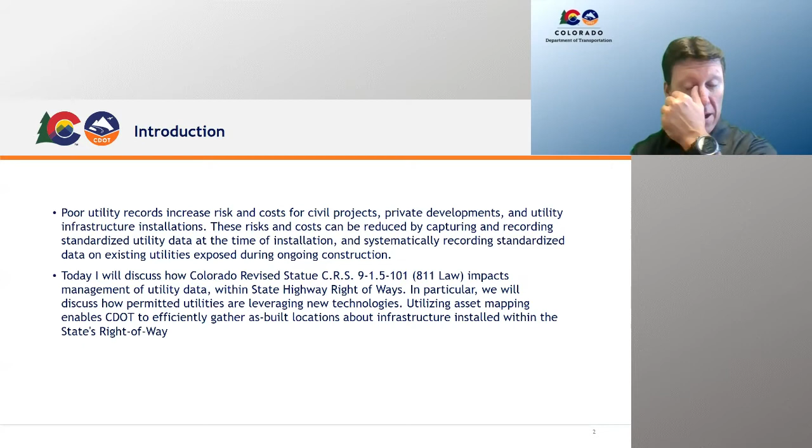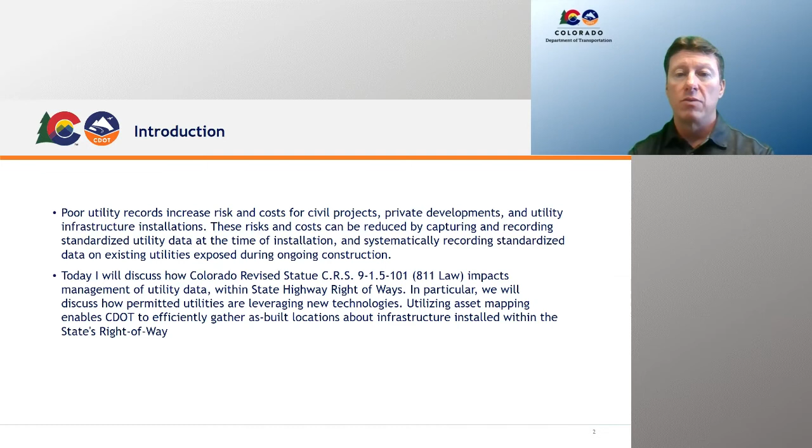You'll see here that I'll talk high level about what our 811 law impacts, but it does impact the utility data and how we manage basically the subsurface utilities and the records as we move forward with our state highway rights of way. And so I'll get into obviously what we're doing and how we're tied to this entire deliverable for utilities.

But nevertheless, the goal here is to identify what our limits are and the expectations for our utility companies, permittees pulling permits, where they cross in and out of our right of way, what's expected. We'll go through some of the examples of what CDOT has put together for those requirements and mandates that we have now for utility companies.

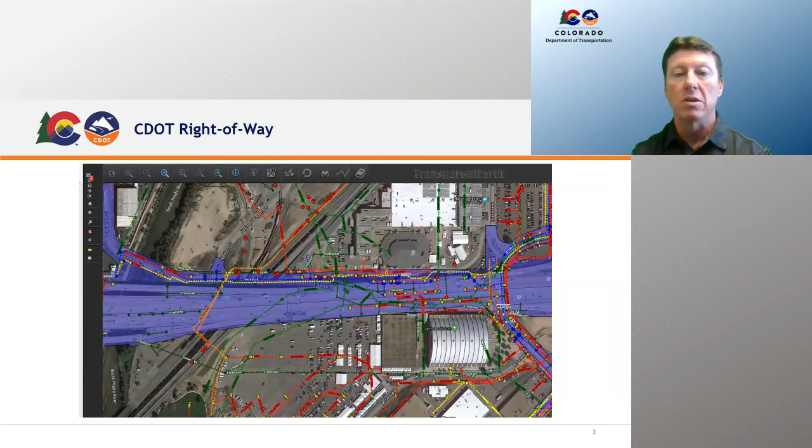A lot of discussion in the last session about a one-stop shop, and I spent several years trying to find a one-stop shop for a database and a mobile application that could process all the different types of data. And if you look at this graphic, when we look at all the survey data that's out there, the SUE data that's coming in, old GIS records or even current GIS records, CAD files and utility relocations, new installations, one call locates, and future projects, this is what we've seen from CDOT's perspective, that we need a place for all of this data to funnel into and then publish to the end users out in the field or in the office.

And so we looked at the Transparent Earth PointMan package for CDOT as a good solution because of how we operate with a lot of the legacy systems we have, and trying to find a solution or build one. We looked at trying to build one internally, and it was really cost prohibitive, and the time it would take to develop an internal process, or internal hardware and process, was going to be a much heavier lift than what we could take on. So that's why we looked at off-the-shelf solutions for Colorado.

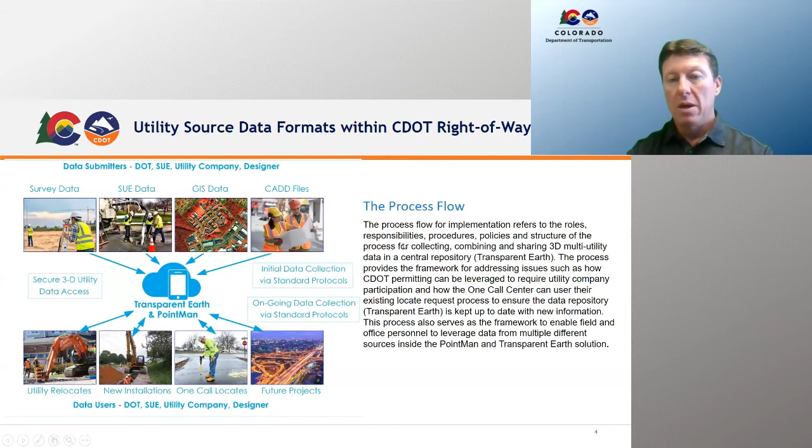And so you'll see our process flow over here on the right, that we're working to implement the roles and responsibilities, procedures, policies, and structure of the process for collecting, combining and sharing 3D utility data. And the framework really comes with having the proper tools for that, and then proper rules and regulations to implement that even further. And so when you look at Transparent Earth and PointMan for Colorado, we look at it really as a live subsurface utility engineering file.

The existing and new utilities, the CAD data, we have drone imagery, we have one call and excavation notifications, which a lot of states can tell you is really a place where we find a lot of discrepancy between one call locates for excavation and the amount of data we have supplied to the contractors in our utility plans for construction.

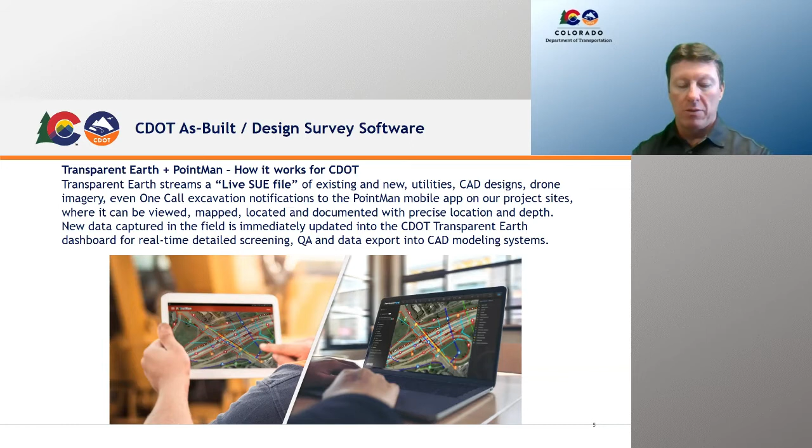There's differences there. Our goal with this process is to have a one-to-one relationship where our construction plans and the excavation locates match perfectly. I know that's unicorns and rainbows, but we really want to see that in the end, where our records are that good that when we work on a pre-construction package, the excavator goes out and they're looking at it with the mobile app, or they're putting it in the cab of their excavator, that they can rely on the fact that the paint on the ground is the same as what's being delivered to them electronically. It's a heavy lift, but that's the goal, that the records become very, very accurate horizontally and vertically. And so this is how Colorado's taking this on.

So it takes the mobile app, it takes high accuracy GNSS receivers like the Trimble R10, the integration to make it simple enough to use for the non-surveyor, and that's part of the goal. As a surveyor myself, I know how complicated it can be to survey with all this technology when things are not working, how to troubleshoot all this stuff.

And so that's still in here, but the startup and the integration and the corrections that we were talking about with R10 Trimble receivers and catalyst correction systems, all that stuff, we want to make that as seamless as possible so that utility companies, their contractors, third-party inspectors, all of these folks working in our right-of-way have access to this technology, and it's user-friendly enough that they should be collecting data at a higher accuracy just based on the simple integration. That's what this is intended to reflect, that you can tie this GPS receiver, RTK receiver to the mobile side much easier.

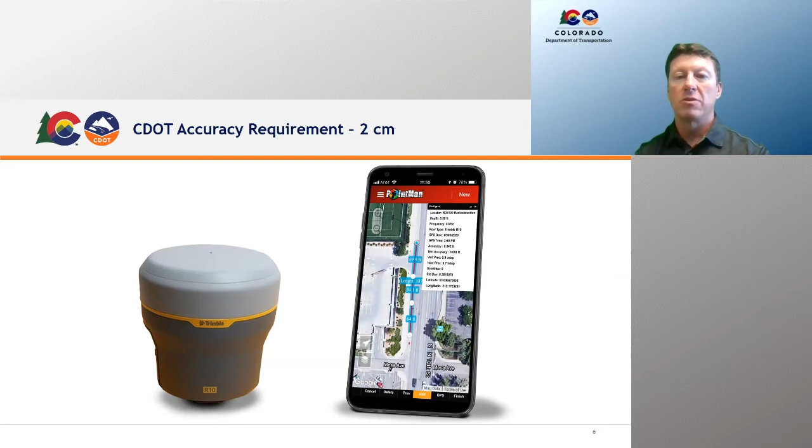And part of what I really like about the system is the survey record capture. Paige spoke about that quite a bit, and this is just one example of some data that we collected on an as-built of a railroad project. New construction concrete panels went in on this crossing.

We were able to collect the final elevation and grade because there was a little bit of change in the tracks. It actually came up a little bit, and so our approach slabs into the concrete panels were rough. And so we were able to go out and actually collect down to centimeter level and see how much the pads had changed versus our approach, and then we were able to tell our maintenance folks how far the approach paving needed to go back in order to smooth out that crossing. And so that's just an as-built on the railroad side of things.

Same thing with utilities, but the slide on the right is also one of the nuances that we like for our mobile app, which was survey information that comes in through the settings side of things. So if you look at the GPS portion of this down at the bottom, you'll see that there's some projections that are built into the library. So NAD 83 2011 is built into there. The geoid models are built into there for those that are wondering about the geoid models in the US. Those give us ground corrected elevations.

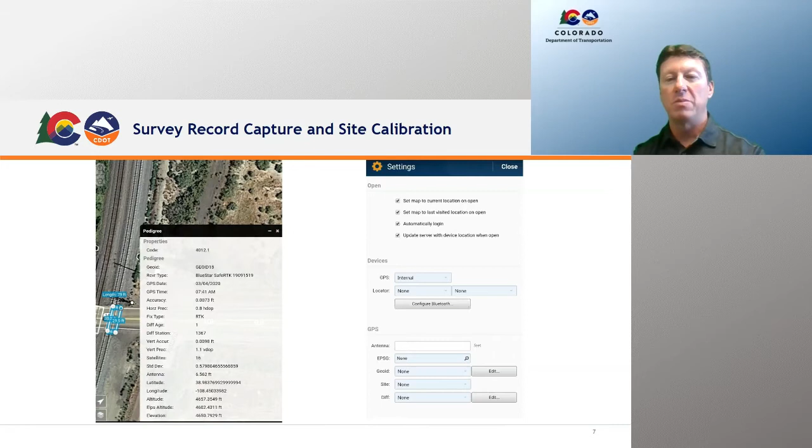So a lot of survey GPS stuff, but this is some of the stuff that we really look to for the GPS or GIS survey kind of hybrid system that I continue to talk about. We're not fully on the GIS side, we're not fully survey, but we're somewhere in this hybrid of survey GIS. So it's more like a high accuracy GIS world. And so there was a lot of discussion about database, and this is the GIS side of it that's important to us, because we're able to grab the metadata from the data that is collected in the field. So if you look at this record, it just shows simply that the owner of this water line is the city of Denver. It's an 8-inch PVC. All your GIS applications will do the same thing.

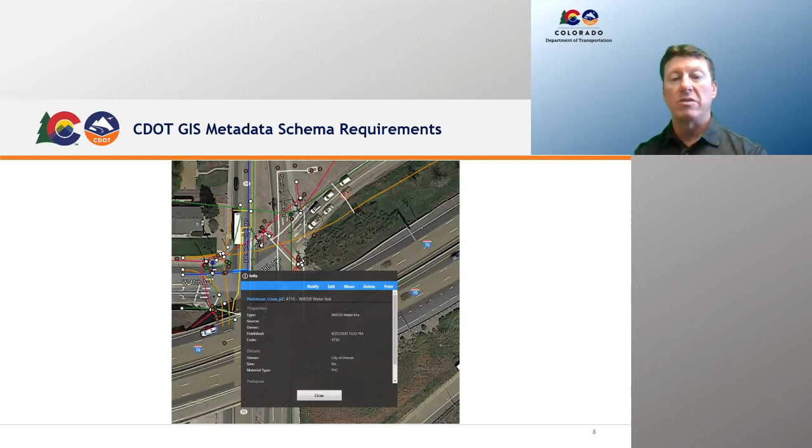One of the things that we really like at CDOT, if you can see it well enough, there's a code in there, 4710. That's a survey code that's built into a custom data dictionary that allows that code to migrate into MicroStation for us, and it will actually add the waterline symbology that's built into our MicroStation world. But more than that, we can also bring in shape files into our MicroStation environment for 3D modeling and clash detection, and that's where having northing, easting, and elevation tied to that is important to CDOT. So with that, that's some of the background on CDOT and our expectations, the hardware and software that we've selected: ProStar, their solution with PointMan and Transparent Earth.

So how do we leverage all this within our right of way? We know that we have the tools. We now have to find a way to mandate or train or whatever we're going to do to get this out there so that it's leveraged. And that all starts with the utility permits on our side. Every utility installation within our highway right-of-way starts with the utility permit.

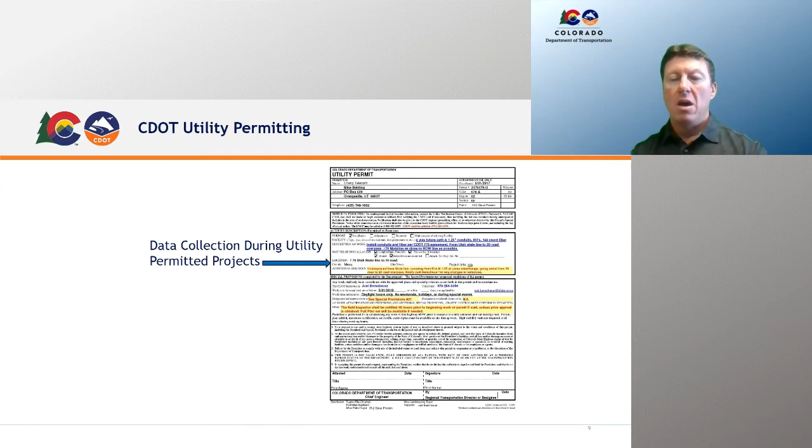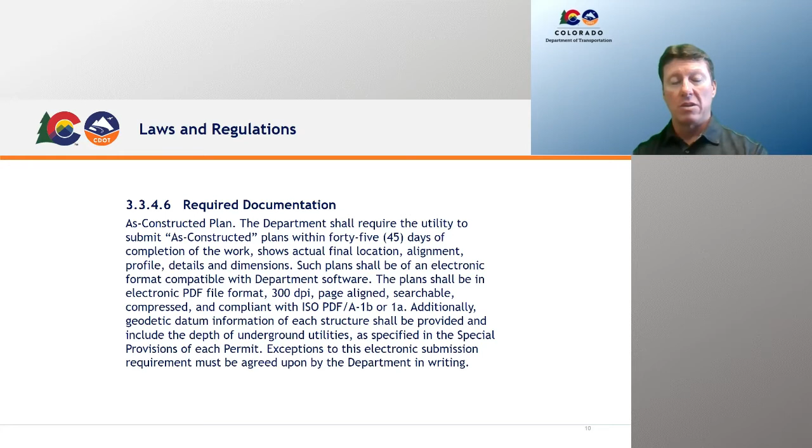And so that permit for us means that we need to make sure that we have required documentation built into our code, so that whenever that permit is executed, the contract between CDOT and the utility owner is clear that they are to provide us as-constructed plans, electronic as-builts, and what that expectation is. And so we have that in our system, in our utility accommodation code, and it's built into our permit terms and conditions and other notifications through the permit. And I'll show you some examples of those here in just a second.

One of the other things that's important for CDOT to follow, that we feel anyway, is this new standard coming out of ASCE. The American Society of Civil Engineers, the Construction Institute, and the Utility Engineering and Surveying Institute have developed a standard guideline for recording and exchanging utility infrastructure data in an as-installed condition. This document is very important for us because it standardizes the expectation of what the as-built needs to be and what it needs to look like.

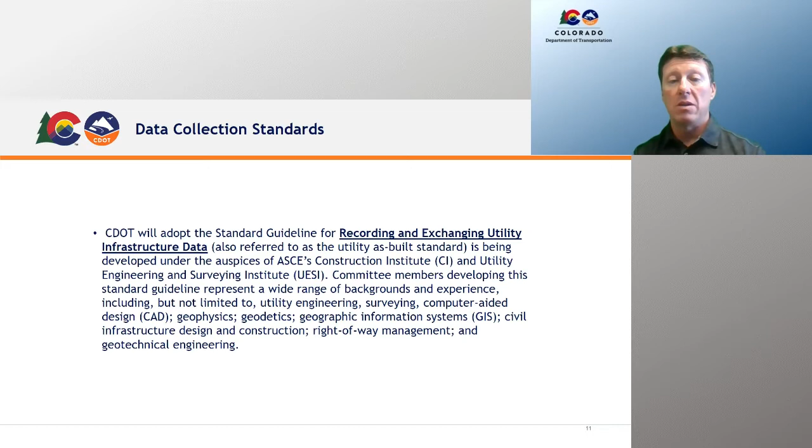There were a lot of committee members from a wide range, as you can see, of backgrounds and experience that provided the guidance in this document. For me, I really think it's good information to use, and so we are. In our terms and conditions, we provide the expectation to the utility companies and their contractors, or the third-party inspectors working on these projects for the utility companies: what is the expectation for data collection?

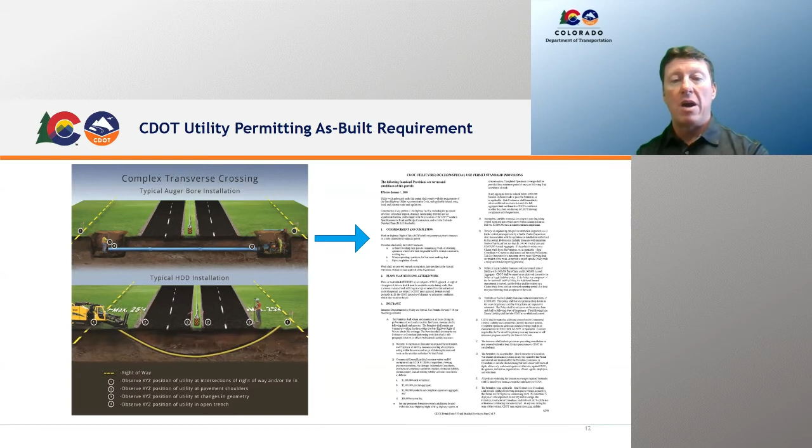This is also part of our as-constructed requirements for the utility companies: requirements for projections and coordinate systems, and positional accuracy specification. We also provide the list of equipment that we will accept for pairing with the PointMan mobile app. CDOT provides the PointMan mobile app free of charge to those pulling a permit from CDOT. In this as-constructed guidance we provide a link to sign up and a short video that shows them how to get started and log into the CDOT environment.

One thing to really note is that once they're signed up and logged into our CDOT environment, the data they collect all streams through that user ID into our environment. So there's a lot less manual effort, almost zero, when it comes to supplying their observations into our database. And what's helpful for us is when we require the personal ID, we can see who it came from.

For example, if you're an energy company and you have six subcontractors or prime contractors working on a project, all the users of the mobile application need an ID and login. We're up to almost 200 users in our system right now with all these contractors working for the utility companies, which is really important because I can drill down and search through the database in Transparent Earth for who provided the data, when, and how.

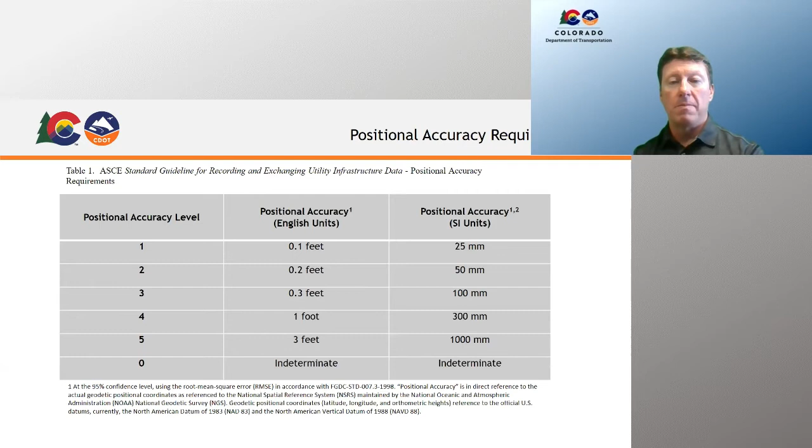For us, we're just looking for the quality of the record that's in our system, and can we use it and leverage it for design later on, or do we need to spend money to update that record to a higher level of accuracy? And I'll get to why that's important based on our SUE law here in just a little bit.

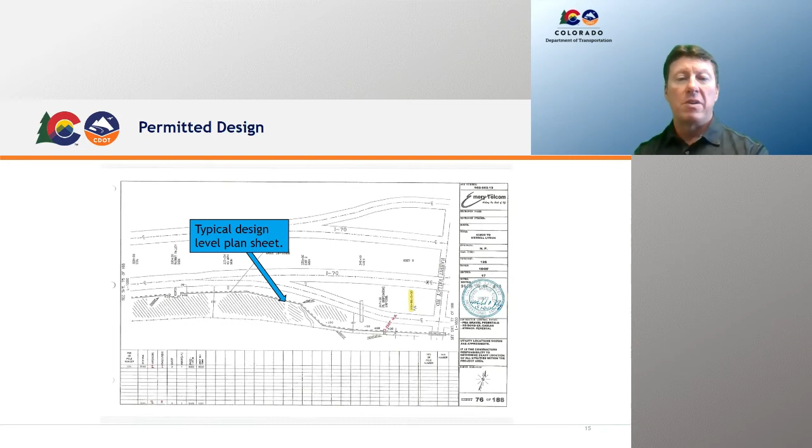So when it comes to permitting, this is an example of why we're pushing for more of this data to come in through our new system. Previously a permitted design looked like this. It'd come in. This is just a simple telecom. They identified where they were going to put this line in our right-of-way, stamped it, certified it, provided us an electronic PDF version of it. Said, yep, this is where it's at.

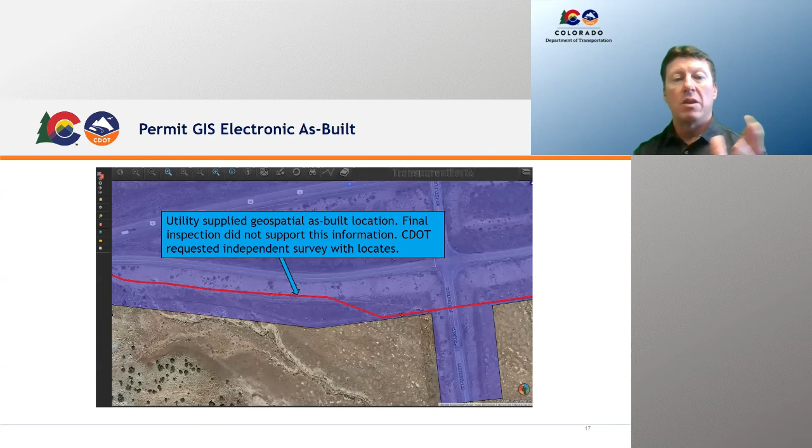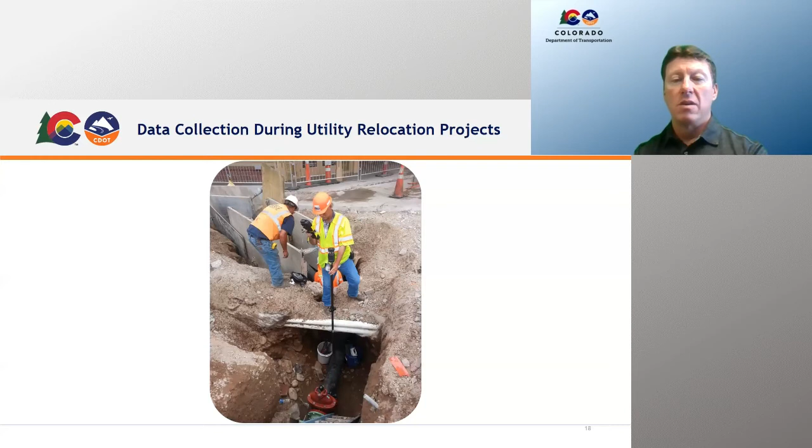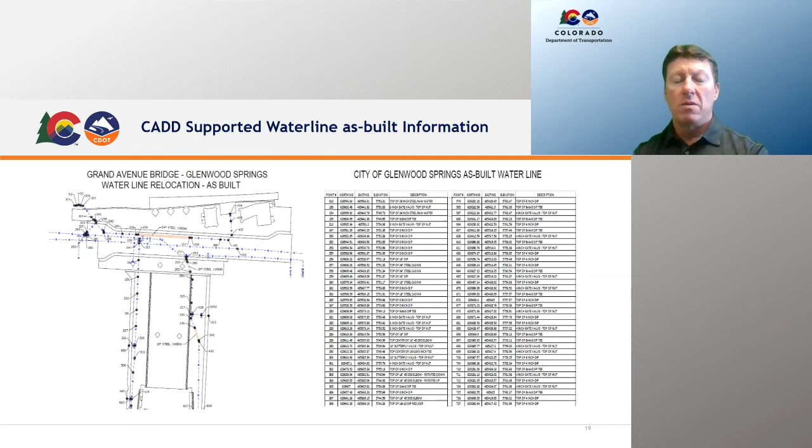We're good with that. We're going to provide you also with the electronic GIS file. So they provided a shape file. The red line is what we were given by the utility company. And lo and behold, we had some issues with that. Before we'd implemented data collection with an inspector and third-party inspector, we'd end up with CAD data that looks like this that never made it into our database, and so we struggled with some of our as-builts in the past.

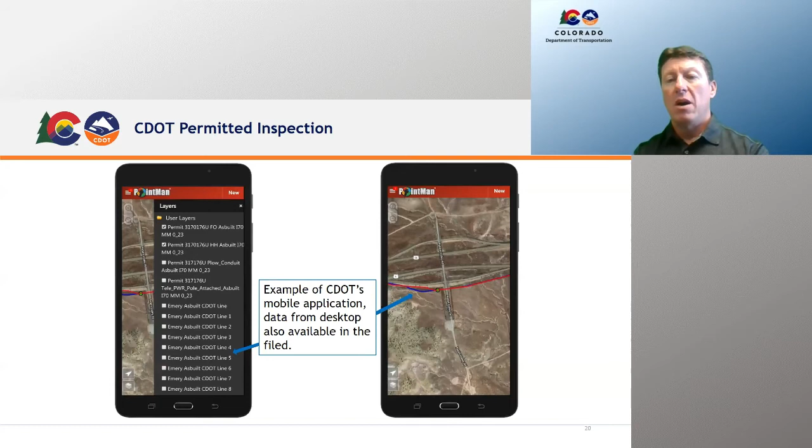Our inspectors now are out in the field rather than the old method of just the data collector and the survey antenna. It's more interactive now. We're using the mobile app, and we're using the GNSS receiver. You can barely see this, but there's a blue line that's showing up now from when the CDOT inspector went out in the field. They noticed a different line of disturbance in this area. And so they surveyed it in, and questions came up about where it was actually installed.

And lo and behold, the blue line is where the telecom line was actually physically put in the field. It was never conveyed back to the office that it needed to be corrected. So what had happened was the designer pushed out the red design, said, yeah, nothing changed in the field, which everybody knows is almost unrealistic. We know things always change in the field. So this gives us more leverage in the field to see.

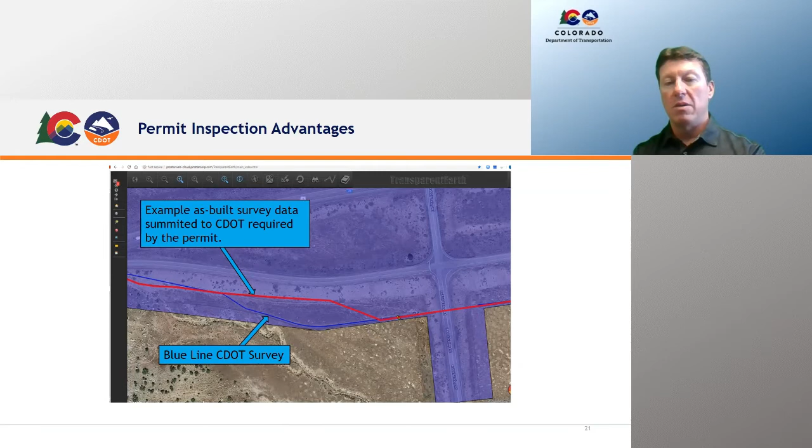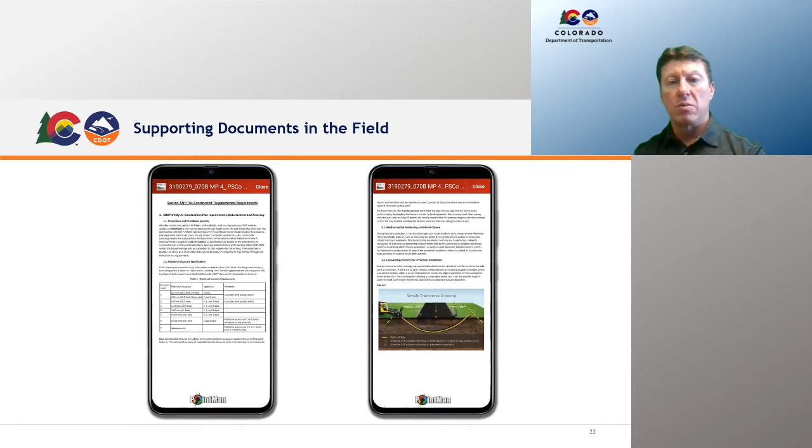Also in there are the plans that were provided to us by the utility company as their design. And so we can look at that. If something's starting to vary with our construction inspection, we can refer back to the plans that were provided, and then bring up more questions if needed. But furthermore, we can also document it with our construction and inspection form that's also embedded into the mobile app. So we have a daily observation form with photos and sketches that are embedded within that form.

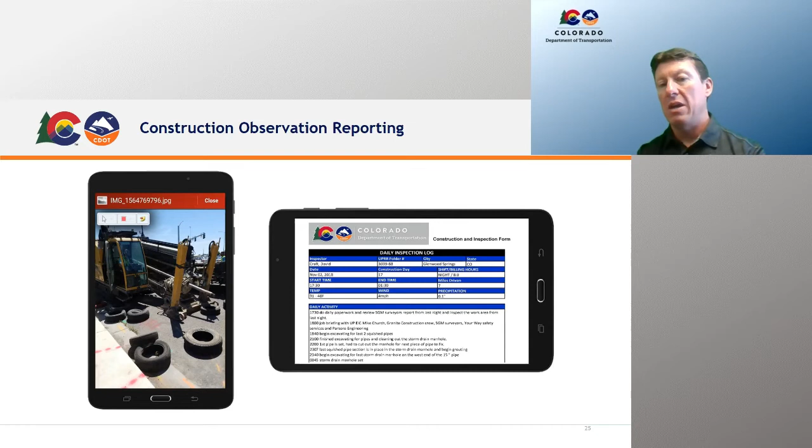And so the daily logs are extremely important to document how the installation was going, what happened from day to day, to capture a good record of everything. And then what's nice is it's geospatially referenced. All this is in there for future reference, whether it's mobile or office. It is captured there.

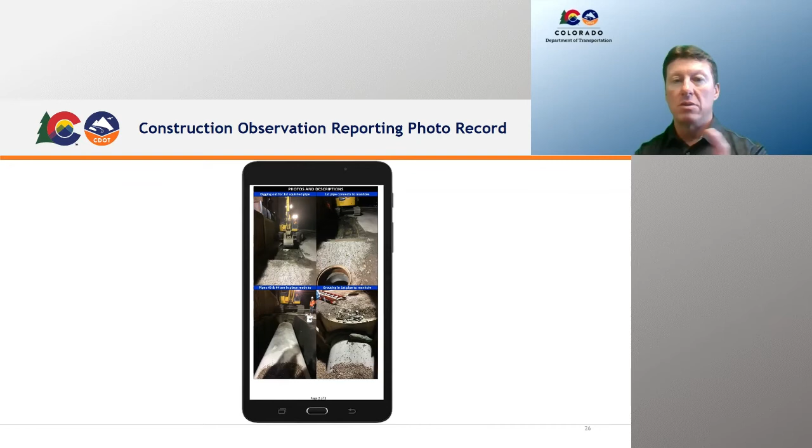And on the office side in Transparent Earth, we can search quickly through the database and see either by user or by date or whatever it might be.

So when we look at the subsurface utility engineering side of things for CDOT, this is on the pre-construction side. You can see that our requirements are pretty specific, that we have a SUE notification that goes out. Our engineers of record have to be competent in utility construction and survey and geophysics, and they have to then work to provide a quality level B product based on ASCE 38 standards, whether that's 02 or 38-22, doesn't matter. Our law is specific to 38, doesn't differentiate. It's whatever's the current version.

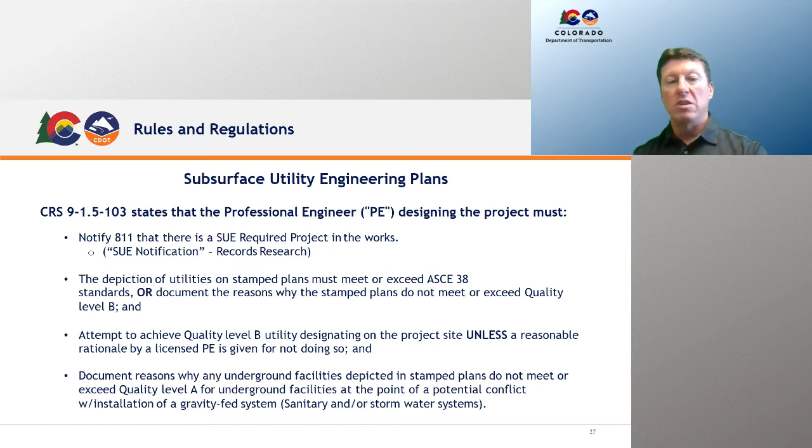And so yes, a quality level B package has to be attempted unless there's some sort of reasonable rationale why they couldn't get there. And what we see, that reasonable rationale from our certifications, is because of poor quality records. The records that they start with, it's almost impossible sometimes to use every geophysical tool in the book to even find it. And so there are issues with the records, and that's again where we're focused on providing records for our SUE vendors in order for them to achieve a higher quality level for our future projects.

One nuance with our Colorado law is that all underground utilities must be electronically locatable when installed. This is a good thing, that even laterals, so anything going in the ground has to be electronically locatable. There's been some guidance put out by our safety commission, which is new, that 15-member safety commission that implements rule making based on the law. So they've defined electronically locatable. I'm also working with that safety commission to define survey accuracy tolerances for electronically locatable, as well as tracer wire, marker balls, other things. So that's still ongoing.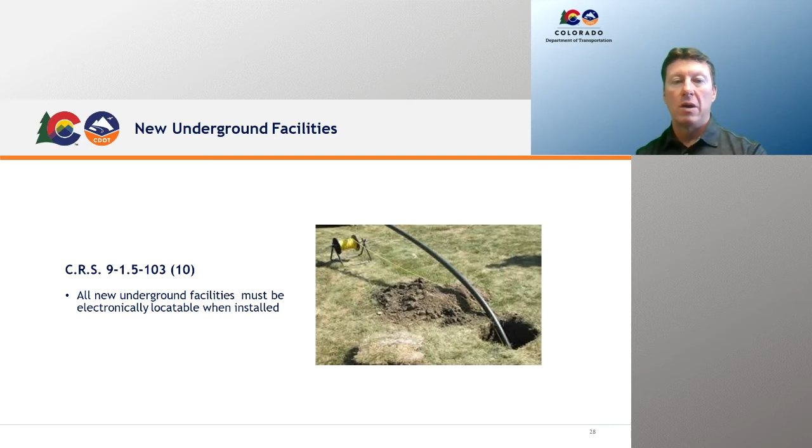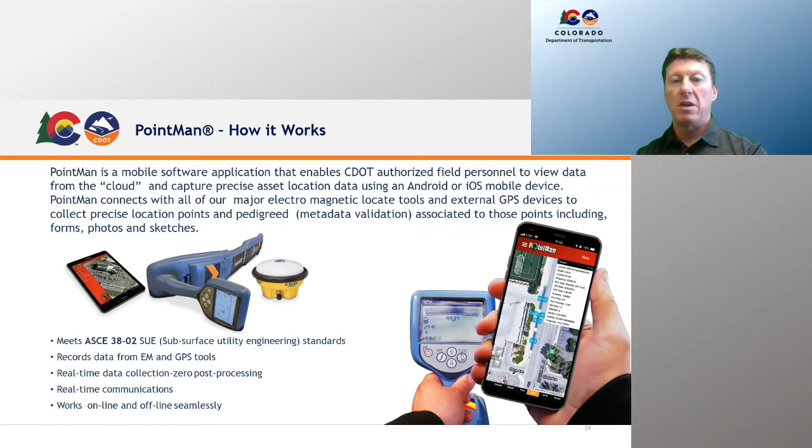Our SUE vendors really seem to like the ability to publish SUE information right into Transparent Earth, the PointMan, and the EM locator and the GPS antenna. Paige spoke to that. This is some actual data on an intersection project that was published directly from the SUE investigation into our system. The record on the right-hand side spells out all the survey information, but also the EM locator information and how they came to a quality level B designation, which is on there.

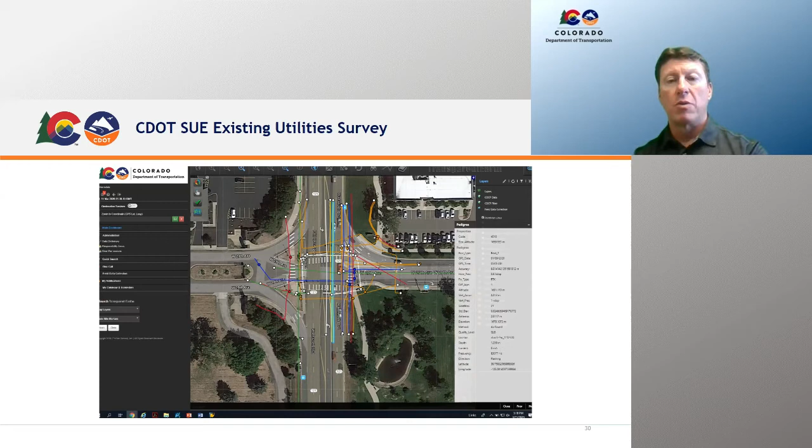And so some SUE vendors will not designate it in the field. They'll go back and compare it to records, and then they'll assign it later. But that can still come back into our system, and we still have a snapshot in time for what that subsurface utility data looked like. And so again, on the mobile app side, this is the same data, just out in the field if need be.

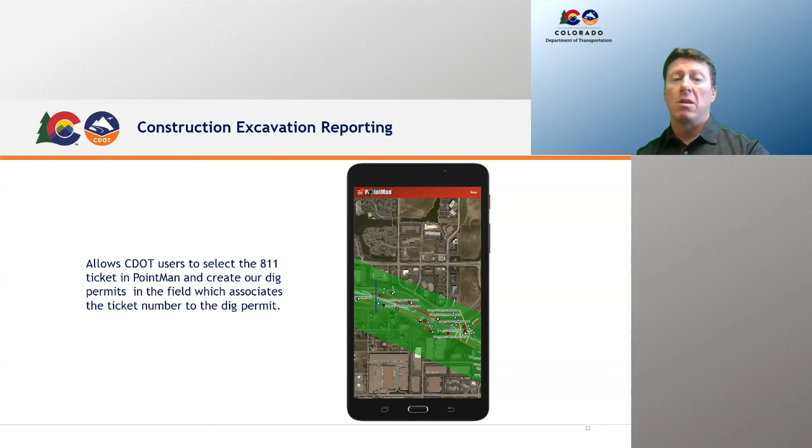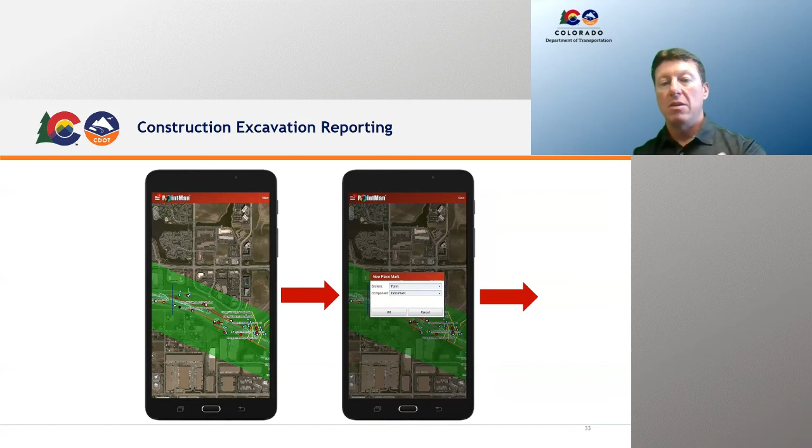Paige Tucker touched on the 811 integration. CDOT really finds a lot of value in this. In fact, I was just meeting with a telecom last week about how they want to mandate their locate vendors. When the one call tickets come in, they're going to track them through PointMan. When they do their locates, they're going to use the EM locator paired with a GPS antenna to capture that data and provide it into their system, so they start capturing better records, and then we can share that data. So there's that collaboration that's quite huge between the utility companies, their locators, the agency, and this again leveraging the technology.

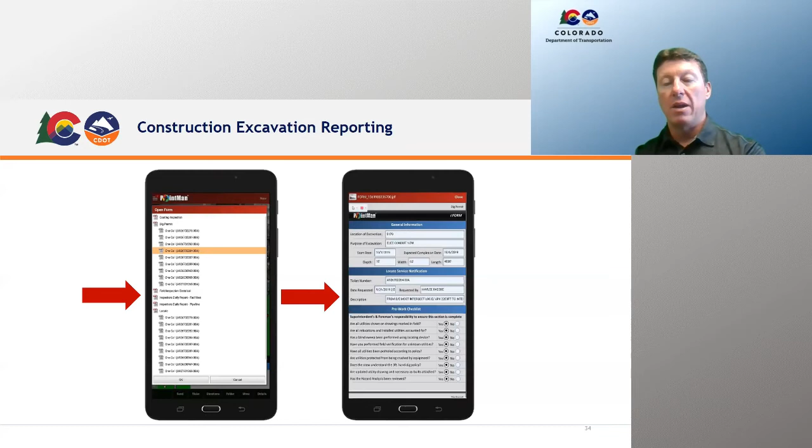So this is another example of the locate ticket, and then our locate form that allows those that are trying to investigate that ticket to access and pull the data out of the one call database and auto-populate the form.

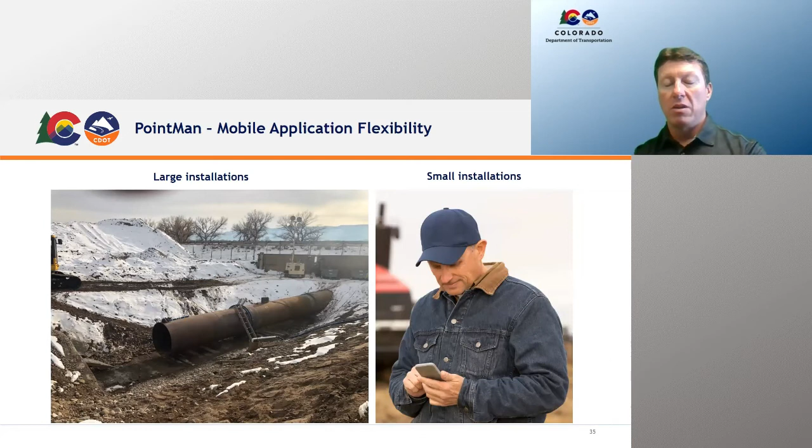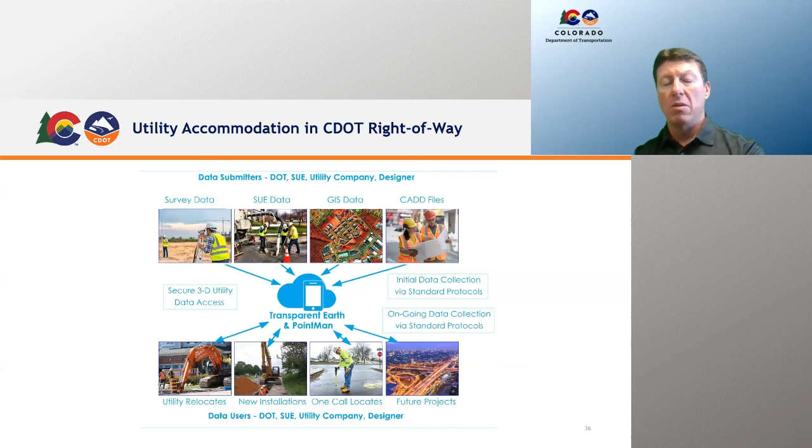So getting back to what CDOT's trying to accomplish, from large installations to small installations, we're going to leverage this technology to capture all the data, one location, one mobile device that will be out in the field, leveraging that mobile application and our database. Over time, we do feel like our records funneling into one location will be advantageous, and our costs coming down for SUE investigations will offset the cost of paying for software like this.